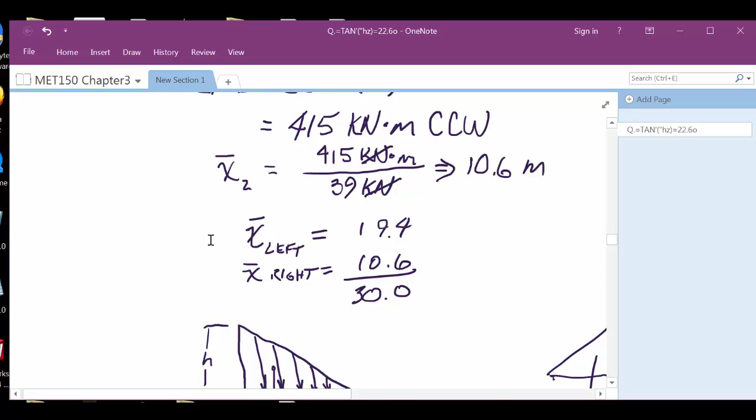If I could remember that example I gave Hari Har. Let's say on one of these problems you had the wrong angle. Instead of having, if I can find it, and it's on one of the other problems we did for homework. Let's see. Let's go back here. And it might not be one of these problems. It might be one that we did. Yeah, let me go here. Let me go right here. And this, now see, I'm really hanging myself out here because I have to be able to remember this, right? But if I don't remember it, Hari Har's got my example of what I showed him, so you could always go back to him and say, show me that piece of paper.

So let's say on this problem right here, you didn't make that the sine and cosine of 40, okay? For whatever reason, you didn't get that number right. But it shows up here and here, okay? I will take off a half a point here and a half a point here, not the whole point, because my way of thinking is you at least put something there. You put an angle, you knew to put the angle, but you got the wrong angle. So you knew the methodology to put the right number there, but you didn't know the methodology how to get the angle necessarily. You screwed that up. But you didn't screw the whole thing up.

So therefore, if you put your work down and show me and make it legible, right? That was part of the thing I talked about last class. I can help you. I can show you that, yep, you got the right method, you just screwed up on your angle. Or like the other day when I screwed up, I had the right angle figured and then I went down and put the wrong number and used the wrong number. Well, see, I would have rather Al didn't take all the credit off for that. I would only want him to spank me just a little bit, not the whole amount. Okay? So that's how I'll do the grading. I think that's fair. I think that's about as fair as I can be.

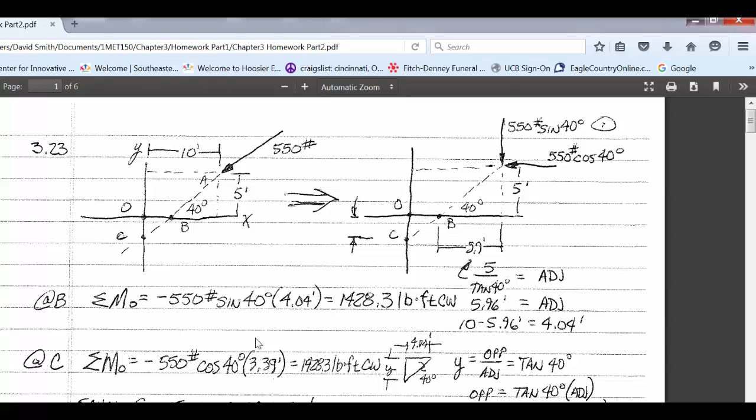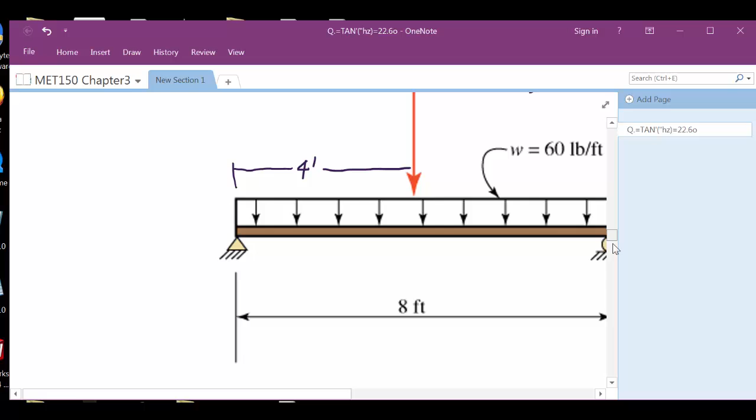And if you can come up with a different system that maybe would suit me to be more fair, then... But that takes all the subjectiveness out of it, I think. It's very objective. Okay? It's kind of like a true-false question, almost. Kind of, but better. Because even if you got the wrong answer, you get half the points. So, but the idea is for you to do well. Okay? If you can show me that you pretty much got the right answer, or you got the right techniques, just the wrong final solution. Why isn't that? There we go. Then we can work together on that.

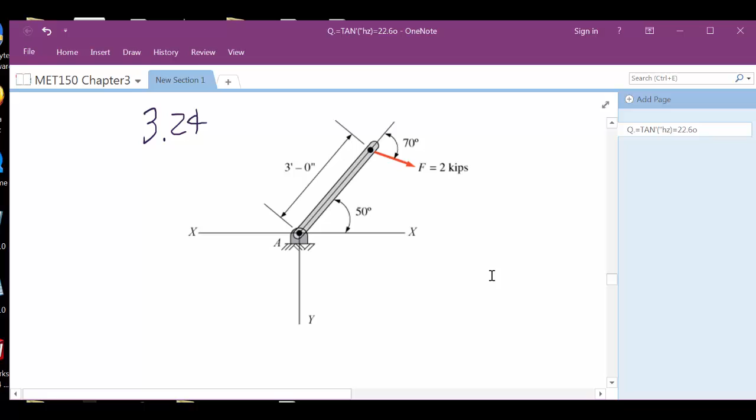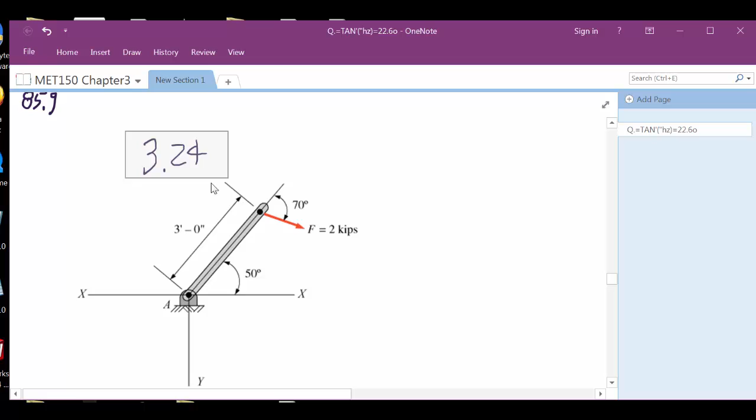And here's the problem where that's really going to show up. Okay, this is where that really shows up. Now I gotta go back here and remember how to do that lasso trick. What? Come on. Work with me. Huh. Okay. Guess that'll work. And actually, we want to move this up, don't we? Give ourselves some room. Okay.

Is this one of the... Was this one of the homework problems? Yeah. Well. I got it wrong. Oh, no. Are we okay on that last example? What I showed you? Does that kind of make sense? You just need to practice it now, right? Okay. Yeah, we're getting close to noon, aren't we?

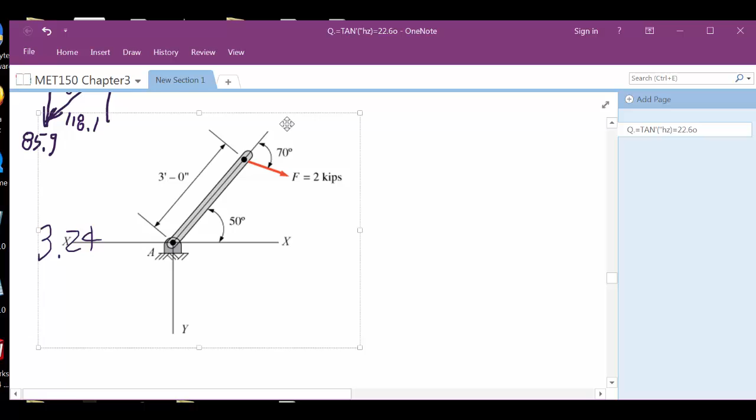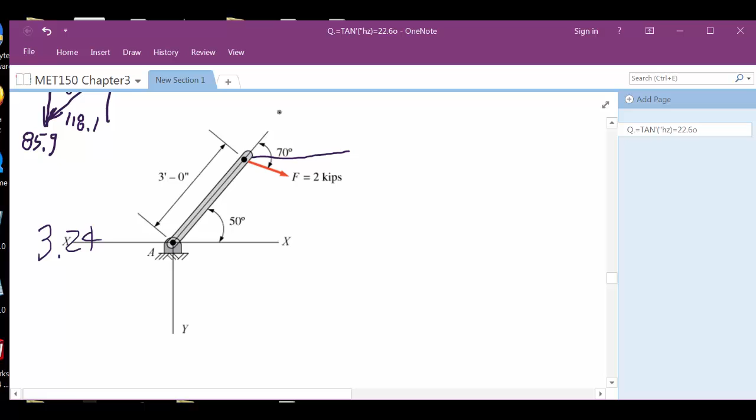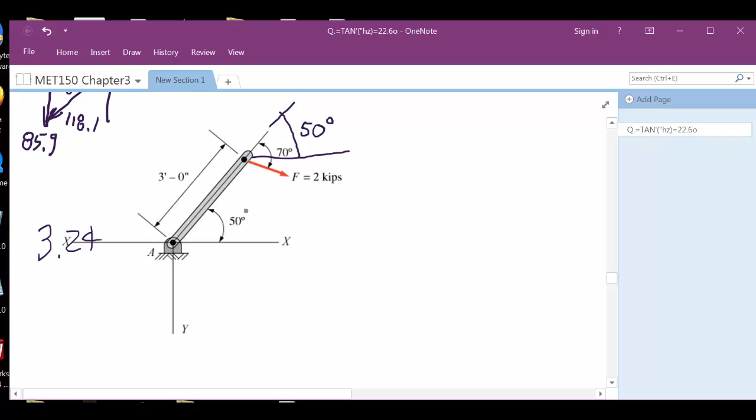Ooh. On this problem, and this is, that's out there for you now, right? Okay. On that problem, the key is drawing the right picture. So, and I've got this picture here, but basically what you want to do is you want to draw a line right here, because then that tells you that this angle right here is 50 degrees, doesn't it? Because this line's parallel to this line, so those two angles have to be the same, right? Which means that this angle right here is 20 degrees.

That's kind of like what we like to see, isn't it? Because based on what we've been doing so far, all of our forces are relative to the x-axis. So we would end up with two kips at 20 degrees, wouldn't we? And I'm going to kind of hurry through this so we can do a couple more other things. So that we take care of.

Then we have to, I am doing the right problem, aren't I? 323. I got to make sure. 324? Yeah, I said 323. Well, that's on this same page. But as you can see, 323 and 324 are both on that same page, so there's not a whole lot of tough stuff there.

Let's see. So on that problem, we've got that, and all we need to do then is what? We get our cursor here. We end up with a force right here that is 2 kips sine of 20, and a force, if you will, right here, which is 2 kips cosine of 20, right? Well, we know this to be 3, so what we're looking for is this x distance and this y distance. Correct?

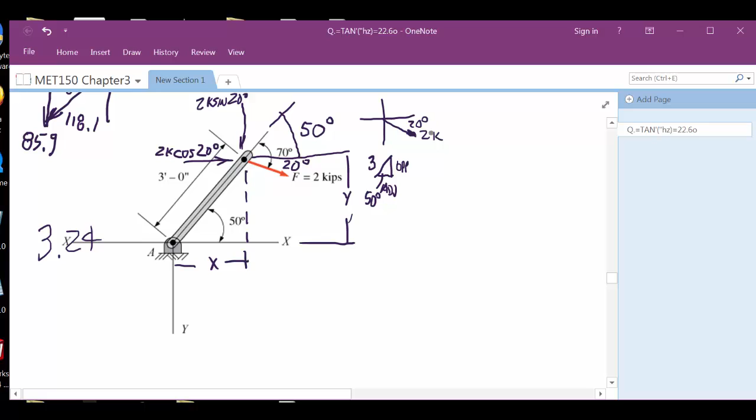Well, me being a simpleton like I am, I draw a little triangle here. And I know this is 3, which is the hypotenuse, right? And I know this angle to be 50 degrees, right? And this is the side adjacent, and this is the side opposite of the angle. Well, me being me, I know that opposite over hypotenuse equals what? The sine of 50, right?

Well, I know the hypotenuse, so opposite equals the sine of 50 times 3, doesn't it? See, this goes over to the other side and becomes a multiplier then, right? So then I know that sine of 50 times 3 should equal something like 2.29 feet, which ultimately is the y value, isn't it?

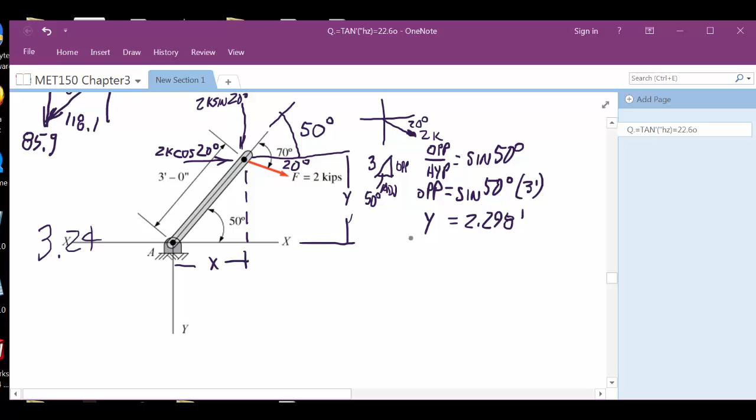Then to find the x, well, that's the adjacent. I know the adjacent over the hypotenuse equals the cosine of 50 degrees. Well, the adjacent then is the cosine of 50 times 3. And that equals 1.928 feet. That's the hard part of the problem there.

I'm done now. Because I just go in there and do a, well, did I need to do the, yeah, all I'm finding here is the moment, right? For this problem, or do I need the resultant? I may not have done the whole thing. Just says calculate the moment. Okay, so I do the moment about point. Do what? We only needed the y for the moment.

No. Because look, there is a distance here, and there's a distance here. This is the force that's acting. Okay? Well, there's an x component and a y component doing something to this. If one of those two were going through this point, then you wouldn't have to deal with it. So maybe the other problem that I was doing, it was going through the point, that's why we didn't need it. No. I only did the y. That's why your number didn't come up right.